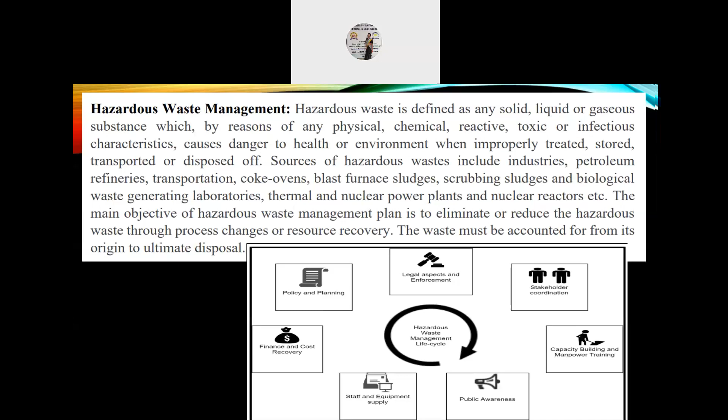Next, the major components of a hazardous waste management plan are as follows. Number one, inventory, which I have already shown in the picture. This is the explanation. So all the industries producing more than 100 kg of hazardous waste per month should be registered. So an inventory of such waste generating agencies and the quantity of waste produced per month should be prepared.

Number two, storage. The hazardous waste generating plants should equip themselves with special on-site tanks, chemically resistant containers or basins for storage of waste. Number three, transport. The waste must be transported by suitable tanker trucks, flatbed trucks or rail cars to the approved disposal sites.

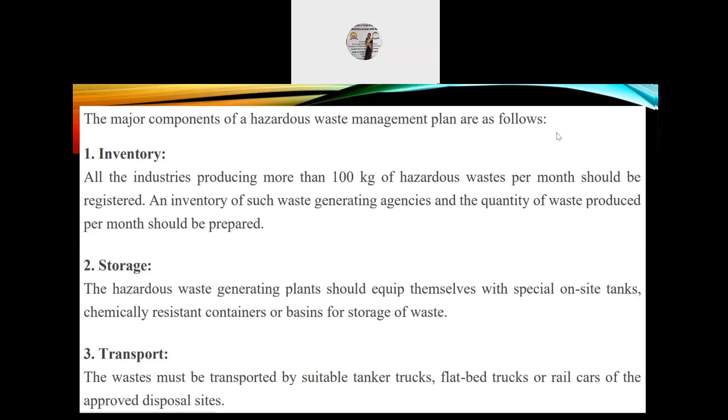Number four, spillage. A well-publicized emergency plan should be prepared to deal with unexpected spillage or accidental release of contaminants during transportation to prevent environmental damage and public health hazard. Number five, disposal. The waste should be transported to a physical and chemical treatment plant for processing or concentration or hauled directly to an approved hazardous waste treatment facility for final disposal.

Number six, waste exchange. When on-site recycling or recovery of waste is not feasible, that is not approachable, the possibility of waste exchange should be explored. So, transferring waste from large industries to smaller ones, which are able to reuse low purity oils, acids, alkali, solvents, or recover valuable metals and other materials from concentrated waste, can also be considered.

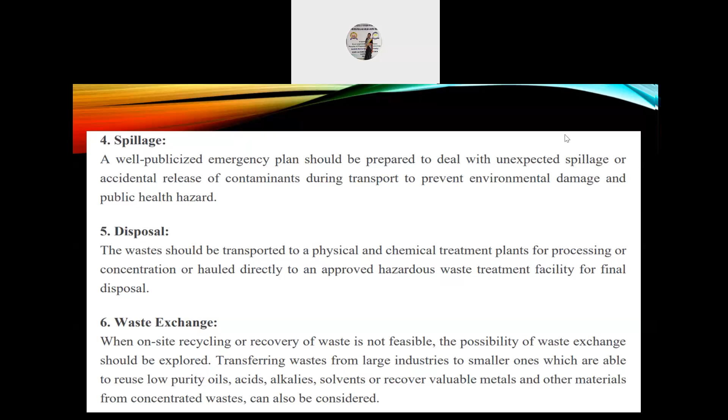The next topic is flood control of dams. So, flow-through dams, also known as perforated dams, are constructed solely for the purpose of flood control and mitigation of flood risk in downstream communities and ecosystems. So, unlike reservoir dams, which are built primarily for water storage or power generation, the spillway, which is the opening, is built at the same height as the riverbed level, allowing the river to continue its natural flow in normal conditions. When the water level rises above the spillway, the dam restricts the amount flowing through the opening, decreasing peak flood flow.

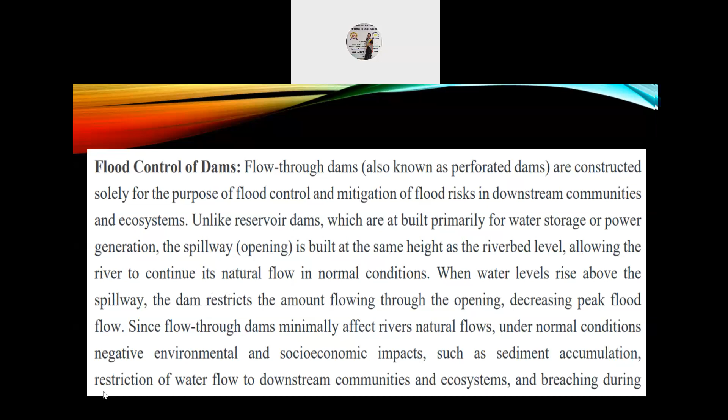Since flow-through dams minimally affect rivers' natural flows under normal conditions, negative environmental and socio-economic impacts such as sediment accumulation, restriction of water flow to downstream communities and ecosystems, and breaching during very extreme flood events can be minimized or avoided altogether. So flow-through dams are constructed in high flood risk areas, particularly those with important infrastructure and livelihoods.

So planners, local decision makers, and construction engineers are the typical stakeholders involved in construction site choice as well as spillway and wall height selection and setting of desired river flow rates and dam carrying capacity. So post-dam construction, socio-economic and environmental impact assessment criteria should be established as part of implementation to avoid negative impacts on ecosystems and local communities. Operational management typically includes general maintenance and occasional clearing of sediments or other accumulations preventing optimal water flow.

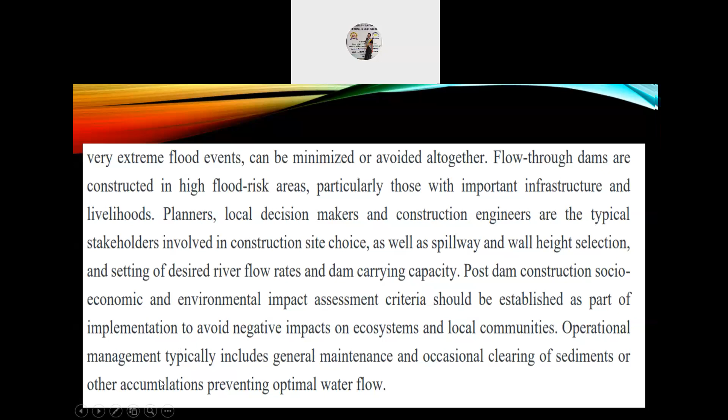So the next topic is multi-purpose water projects. The multi-purpose projects are explained here below. The first one is the Damodar Valley project.

The aggressive Damodar during the rainy season, with all its surplus water, used to engulf the entire region. So periodic and successive flood was so disastrous that Damodar was aptly known as the Curse of Bengal. But after the construction of several dams, recurrence of flood is nowadays a bygone chapter.

So storage dams were constructed at Tilaiya, Maithan, Panchet and Konar. The combined area controlled by all these dams is about 13,500 square kilometers. Hydropower generation plants were erected at Panchet, Tilaiya and Maithon.

So three thermal stations were also created at Chandrapura, Durgapur and Bokaro to provide power to the core sectors of industry and commerce, for example railways, steel plants, coal mines. The major objective of this pioneer

Maybe you should increase your volume, because the volume at my end is full. And also those who are giving your attendance now, I won't accept it since the class is still going on and I am not asking for your attendance now. So it would be better if you concentrate on the lecture.

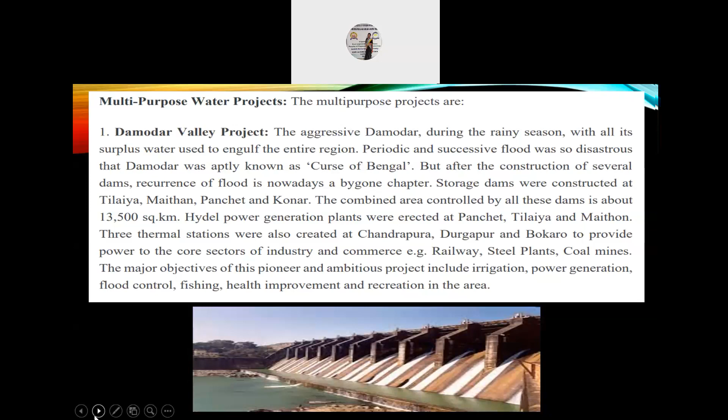Okay, so number two, Bhakra Nangal project. It is the most ambitious project to convert large barren semi-arid tracts of northwest India into lush green fertile agricultural fields. Bhakra Nangal project was one of the largest multipurpose Indian projects constructed over the river Sutlej. So from the constructional point of view, indeed, erection of this dam was a remarkable achievement.

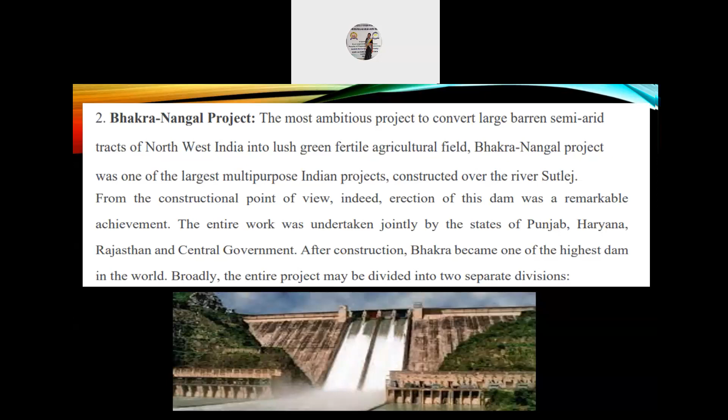So the entire work was undertaken jointly by the states of Punjab, Haryana, Rajasthan and the central government. After construction, Bhakra became one of the highest dams in the world. Broadly, the entire project is divided into two separate divisions. Check your network, Sanjay. The Bhakra Dam: this project has the capacity to store more than 10,000 million cubic meters of water. This lake is known as Govind Sagar.

Number 2, the Nangal Dam, constructed 13 km downstream of Bhakra. Any irregularities caused by Bhakra Dam are rectified here, and the stability of the channel is maintained. So the combined length of the Bhakra Nangal Canal exceeds 1000 kilometers.

So apart from the two main dam storages, this project comprises several other hydel projects at places like Ganguwal and Kotla with total installed capacity of over 1500 megawatts, and a number of irrigation canals like the Bhakra Canal, Nangal Canal, Bist Doab Canal, Sirhind Canal, etc. So almost all of Punjab and large areas of Haryana and Rajasthan are benefited directly by the Bhakra Nangal multipurpose project.

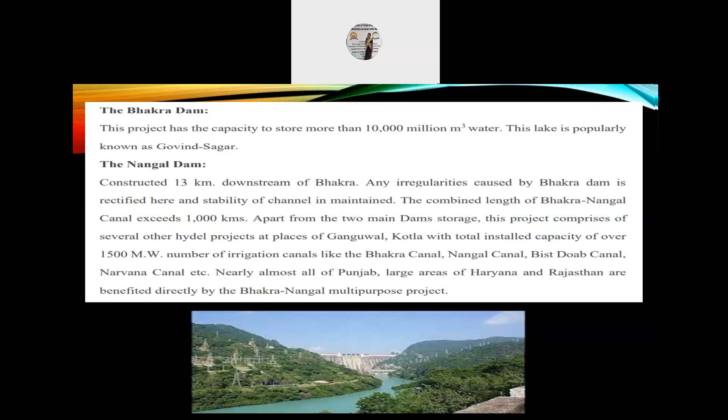Next, the Hirakud project. Mahanadi is the lifeline of Orissa; it enters Orissa from the highland of Naraj. This rapid fall from considerable height provoked planners to erect this monumental dam at Hirakud. This is the longest dam in India. The major benefits behind the construction of this dam were to harness the ample hydel power from the swift flow of water, to control occasional floods and resultant havoc, irrigation canals to large areas of Puri and Cuttack districts,

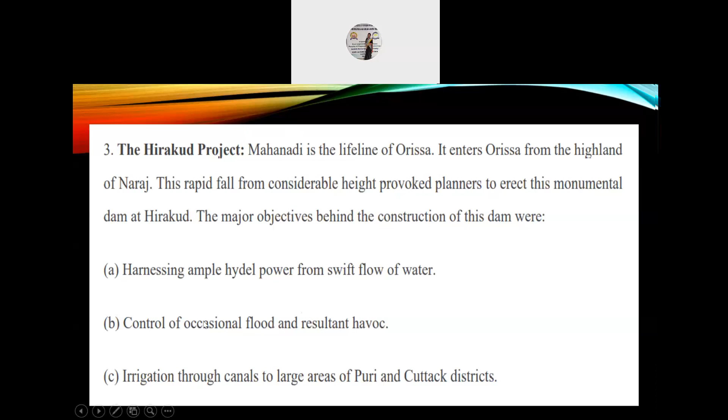then improvement of water transport through greater navigability, overall economic development of the area by providing employment at the project, rapid industrialization of the area through stable and assured power supply, and the increase of other minor economic activities like fishing and tourism.

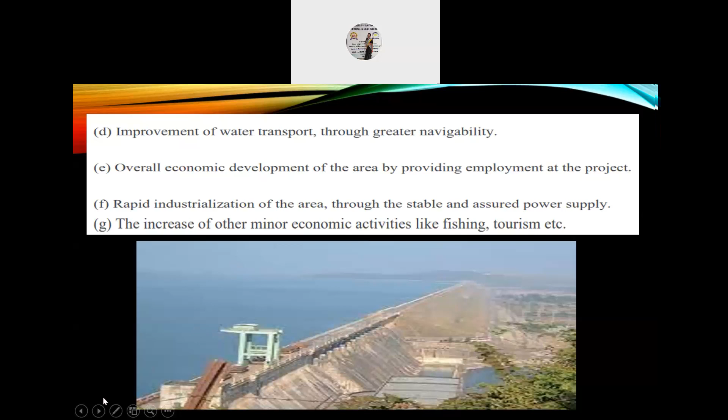Number 4, the Nagarjuna Sagar project. This is the biggest river project in Andhra Pradesh. A dam was constructed near Nandikonda village. This project was made to ensure irrigation water in Khammam, Guntur and Kurnool districts.

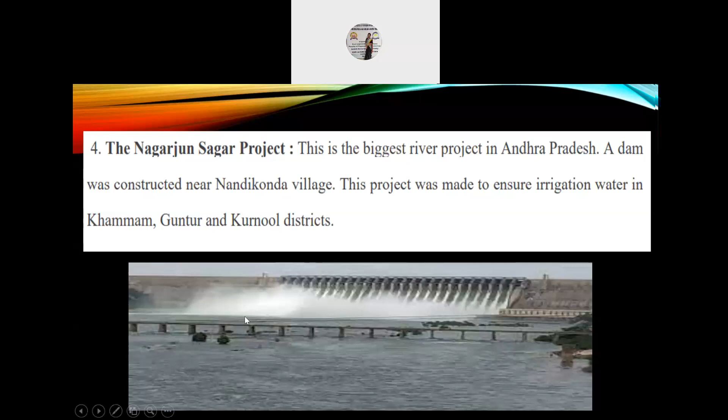The last one, number 5, the Beas project. This project was constructed as the extension of the Bhakra Nangal project. The growing need of irrigation and consequent increasing demand of electricity compelled the planners to select Beas as the potential source of water for another multipurpose project. This project may be divided into two distinct parts.

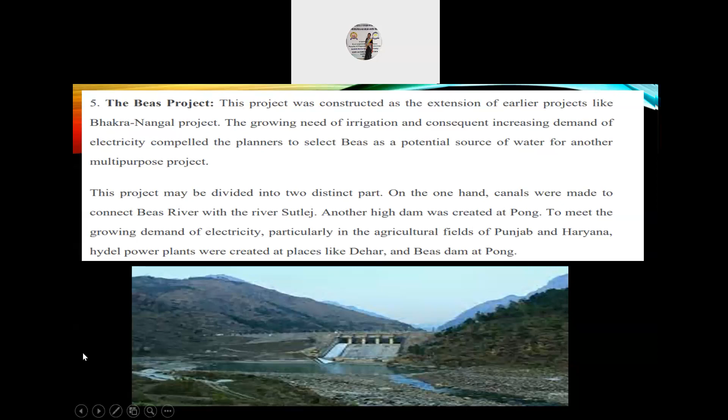On one hand, canals were made to connect the Beas River with the river Sutlej. Another high dam was created at Pong, in the Himalaya. To meet the growing demand of electricity, particularly in the agricultural fields of Punjab and Haryana, hydel power plants were created at places like Dehar and the Beas Dam at Pong.

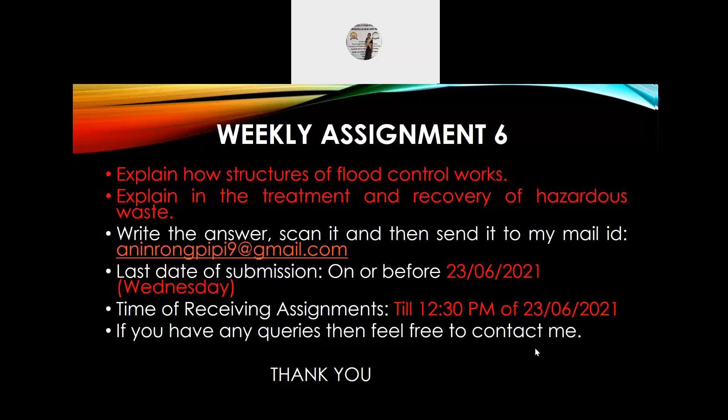So this is weekly assignment number 6. You have to explain how structures of flood control work, and the second one, you have to explain the treatment and recovery of hazardous waste materials. The last date of submission is given here, and the last time of receiving the assignments is also given. It is till 12:30 p.m. of 23rd June.

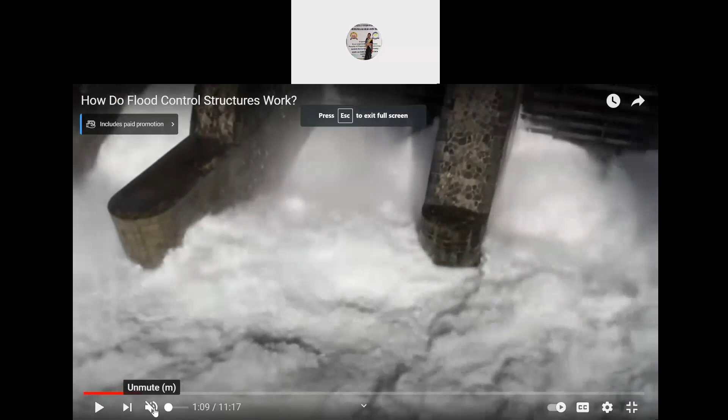We all know generally what a flood is. Too much water in one place at one time. But I think there's still uncertainty in how floods actually occur. Part of the reason for that confusion, I think, is the huge variety of scales we have when talking about flooding. Most river systems are dendritic. The topography of the land and long-term geologic processes mean that streams join and concentrate the further you move downstream, just like the branches of a tree.

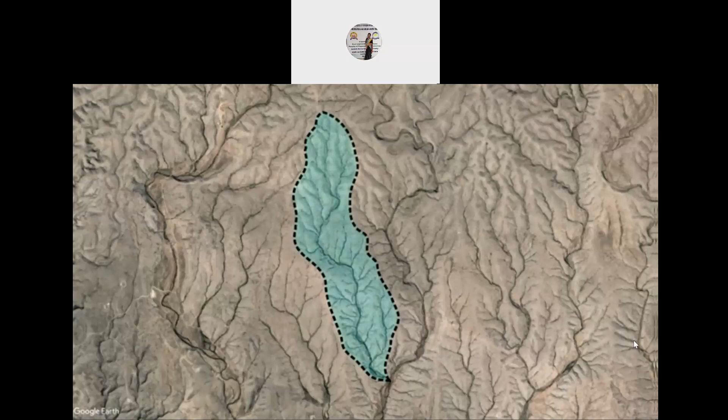A watershed is the entire area of land where precipitation collects and drains into a common outlet. It's a funnel. And as you move downstream, those funnels start to combine. The further you go, the larger the watershed becomes as more and more streams contribute to drainage. So watersheds can be tiny or gigantic. Your front yard is a watershed to the gutter on the street. If it happens to be raining hard directly on your house, the gutter will flood, maybe even overtop the road onto the sidewalk.

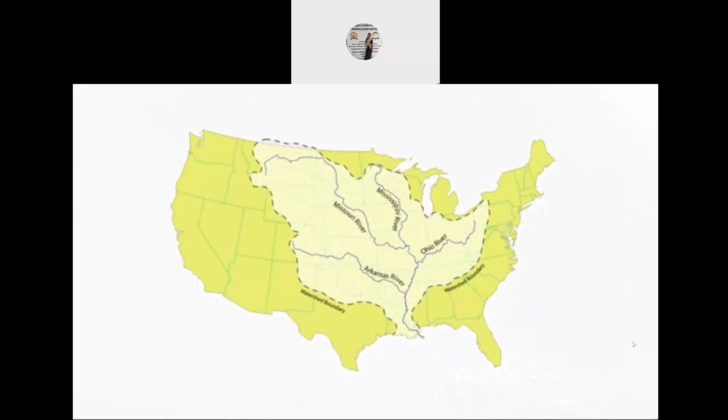At the complete opposite end of the spectrum, more than 1 million square miles, or 3 million square kilometers, make up the drainage area of the Mississippi River in the US. A big rainstorm in one city is not going to make a dent in the total flow of this river. But if everywhere in the basin is having an unseasonably wet year, that can add up into major flooding as all that water concentrates into a single waterway. This seems simple, but it's a real conceptual challenge in understanding flooding, not to mention trying to control it.

Smaller watersheds only flood during single intense storm events called flash floods. Usually this water is already long gone by the time the next storm comes. In contrast, large watersheds flood in response to widespread and sustained wet weather. They aren't really affected by single storm events. Of course, in a dendritic system, there's everything in between, which means a flood can be a local event affecting a few houses and streets for a couple of hours during an intense thunderstorm, or a months-long ordeal impacting huge swaths of land and multiple communities.

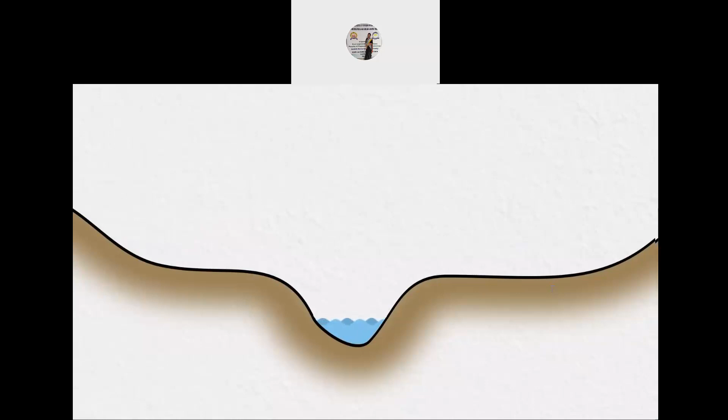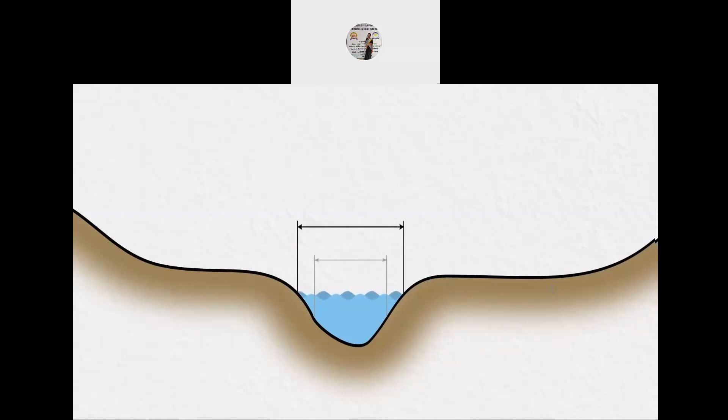Riverine flooding is also a challenge because it's not linear. This is a generalized cross-section through a river. You have the main channel where most normal flows occur. Every unit of rise in the river doesn't equal that much extra width in inundation. Plus, there's not much development within the banks of a river, maybe some low bridges and a few docks. But above the channel banks, things change. The slopes aren't so steep, and you end up with wide, flat areas of land. And you know what we humans like to do with wide, flat areas near waterways?

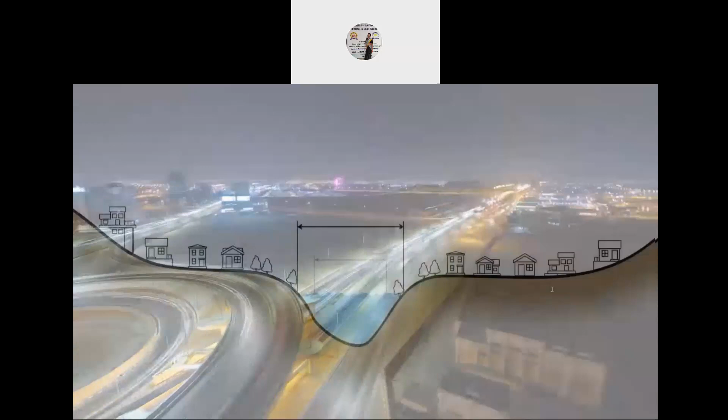We build stuff, like entire cities, there or use it as farmland. The problem is that once a channel overbanks, every unit of rise in the river equals much wider extents of inundation. You can see now why this is called the floodplain.

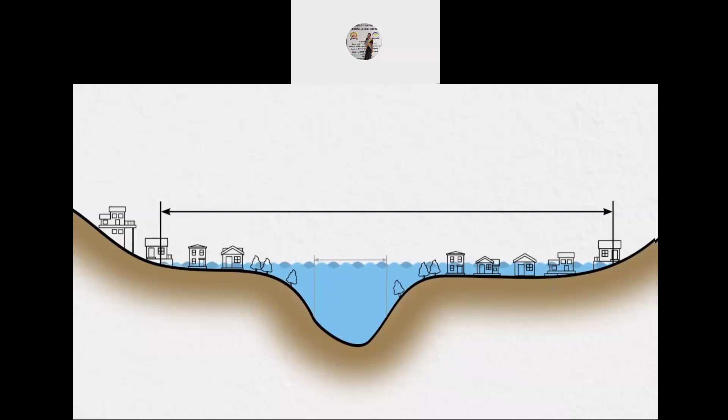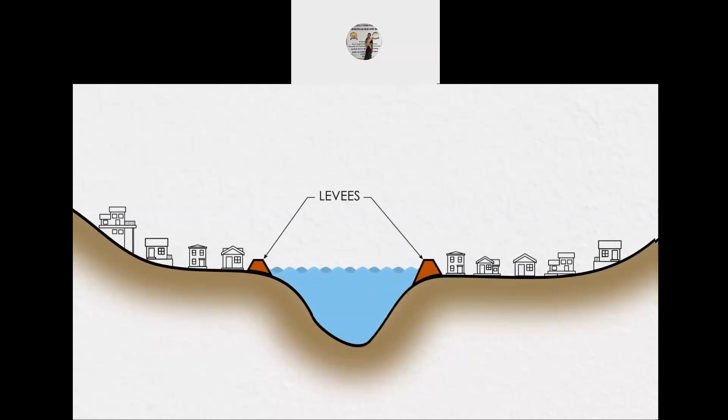And looking at a cross-sectional view, it's easy to see one of the most common structural solutions to flooding: levees. If overtopping the banks of the river creates the problem, we can just make the banks of the river higher by building earthen embankments or concrete walls. Levees protect flood-prone areas by confining rivers within artificial banks. That means areas outside the levees flood less frequently.

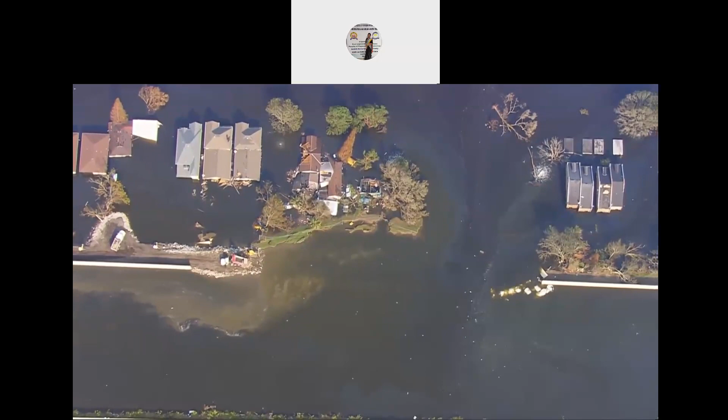It doesn't mean they have zero flood risk at all, since it's always possible to have an extreme event that overwhelms the levees. For earthen structures, overtopping of a levee can cause erosion and even failure or breach of the berm. That can make flooding even worse than it would have been otherwise, especially if people weren't evacuated from the area ahead of time. So even though they're a pretty simple solution to the problem of flooding, levees aren't perfect.

Sometimes getting that water out of the channel is exactly what you want, though. Another tried and true flood control technique is diversion canals. These are human-made channels used to divert floodwaters to undeveloped areas where it won't be as damaging. Often it's not possible to widen an existing river because there's already too much development or for environmental reasons. So instead we create a separate channel to divert floodwater around developed areas and back into the natural waterway downstream.

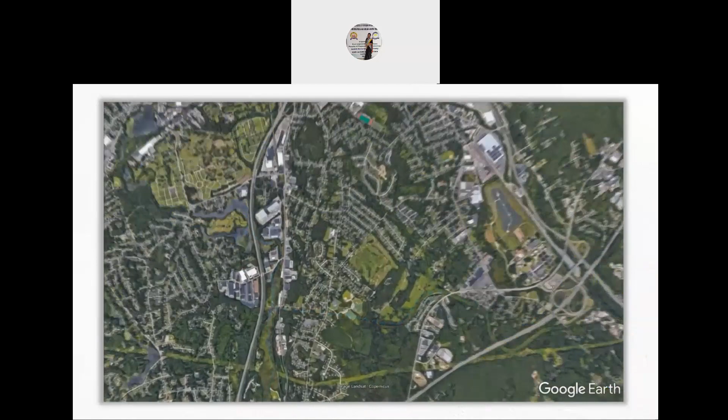In most cases, there will be some kind of structure at the head of the diversion channel to help control which route the water takes. For normal conditions, water will flow through the natural river. But when a flood comes, most of that water will be diverted, reducing the flood risk to developed areas.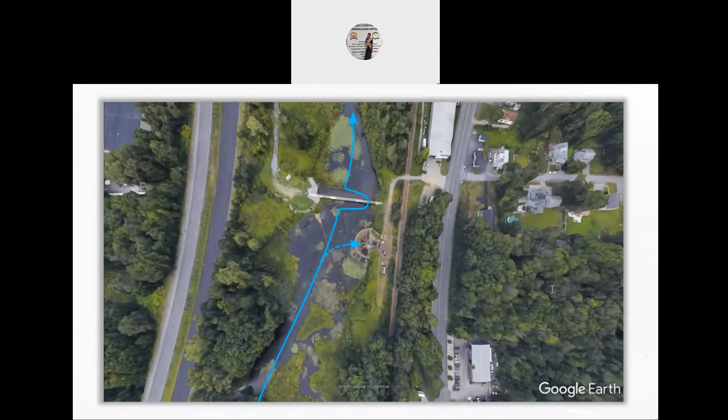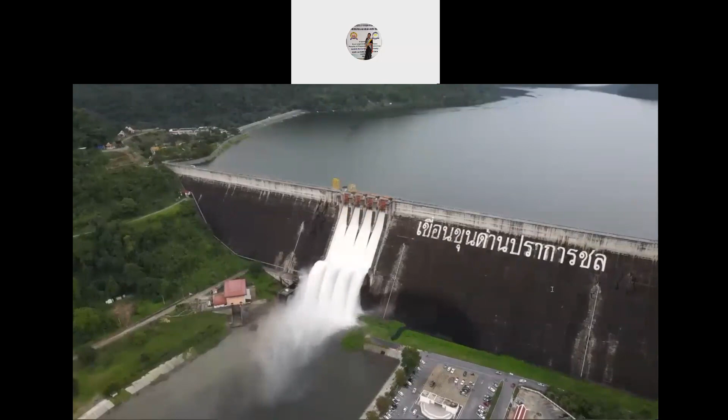But it would be nice if all that water didn't make it into the river in the first place. That's only possible with the other major type of flood control infrastructure, dams. These are structures meant to impound or store large volumes of water, creating reservoirs. Dams meant for flood control are kept partially or completely empty so that when a major flood event occurs, all that water can be stored and released slowly over time.

The theory here isn't too complicated. We can't change the volume of water that comes from a flood, but with enough storage, we can change the time period over which it gets released into the river. Big sloshes of water into this bucket come out slowly over time. As long as the sloshes are far enough apart and the bucket is big enough, you almost never see significant flooding out on the other side.

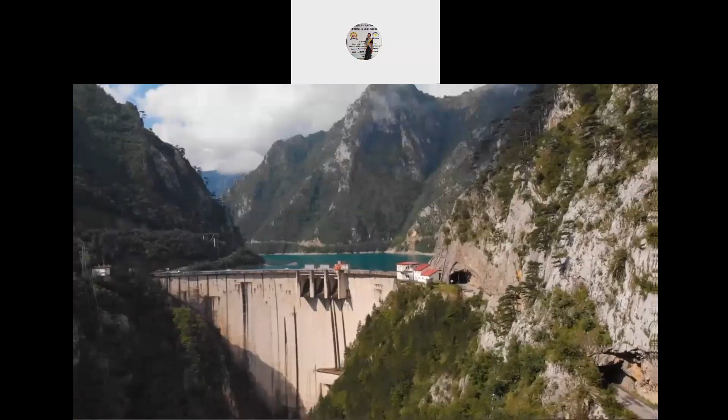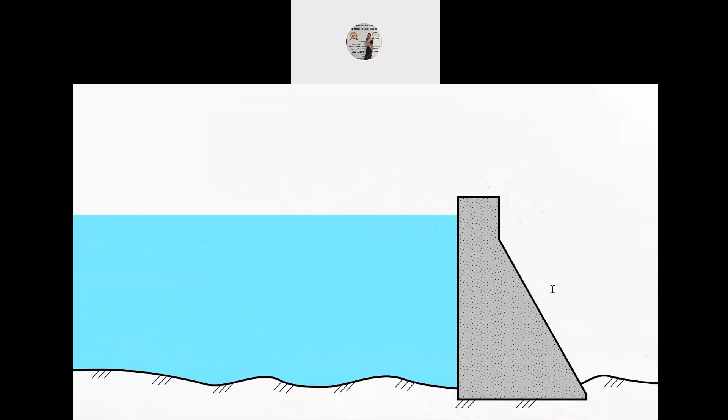But not all dams are built specifically for flood control. Many reservoirs are intended to stay as full as possible so the water can be used for hydropower, supplying cities, or irrigation of crops. If a water supply reservoir happens to be empty at the time of a big flood, it will work just like a flood control reservoir, storing the water for later use. But if the reservoir is already full, they have to open the floodgates to let the water through. This can be frustrating for the residents downstream who may have thought they had protection from the dam.

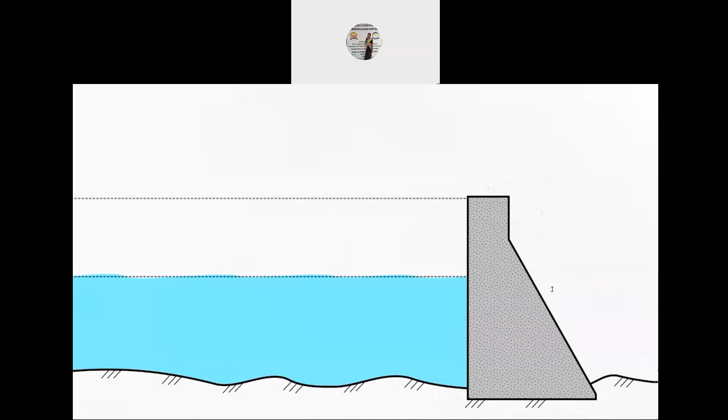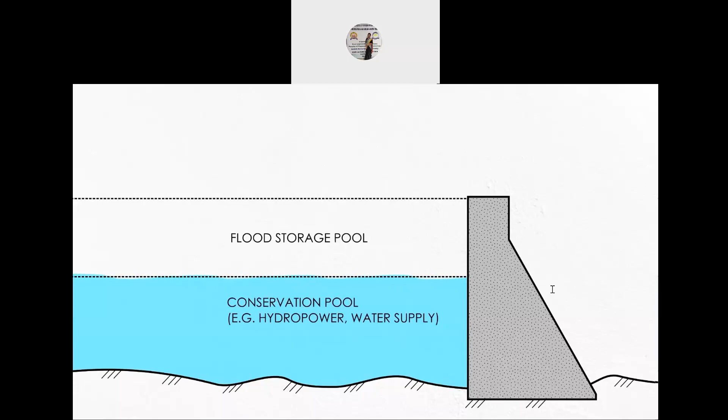In many cases, a dam can serve multiple purposes at the same time. Different zones called pools are established for different uses. One pool is kept full to be used for hydropower or water supply, and one is kept empty to be used for storage in the event of a flood. Finding the right balance point between how much storage to keep full versus empty is a complicated challenge that considers climate, weather, and the maximum amount of flow that can be released without damaging property downstream.

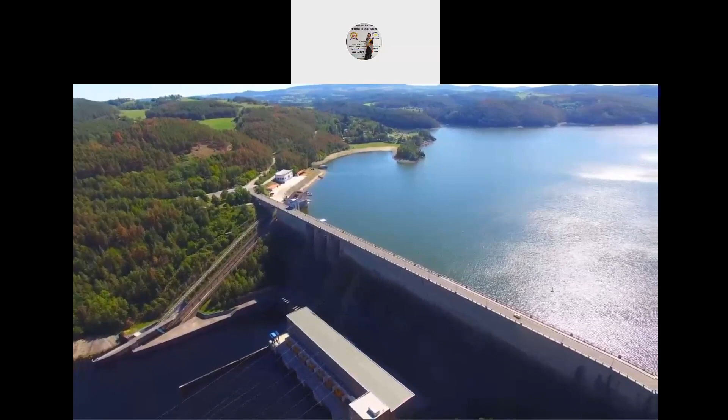Some dams vary the size of these pools over the course of the year, depending on the seasonality of flooding. And some even use risk indicators, like the depth of the snowpack within the watershed, to dynamically adjust the volume available to store a potential flood.

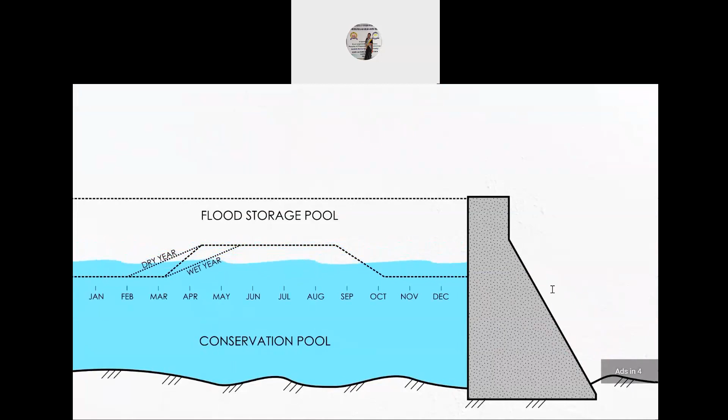I've been using the term flood control throughout this video, but the truth is that term is falling out of favor. Now, if you ask an engineer or a hydrologist, they're more likely to talk about flood risk management. Our ability to quote unquote control Mother Nature is tenuous at best, and the more we try, the more we realize this. Even if expensive infrastructure is helpful in a lot of circumstances, at best it is an incomplete strategy to reduce the impacts of flooding over the long term.

For one, flood control structures, especially levees, can protect some areas while exacerbating flooding in other places. For two, overbanking flows are actually beneficial in a lot of ways. Just like wildfires, flooding is a natural phenomenon that has positive effects on the floodplain, like improving habitat, ecology, soils, and groundwater recharge. And for three, we're understanding more and more the true value of resiliency. That is, instead of reducing the probability of flooding, instead reducing the consequences.

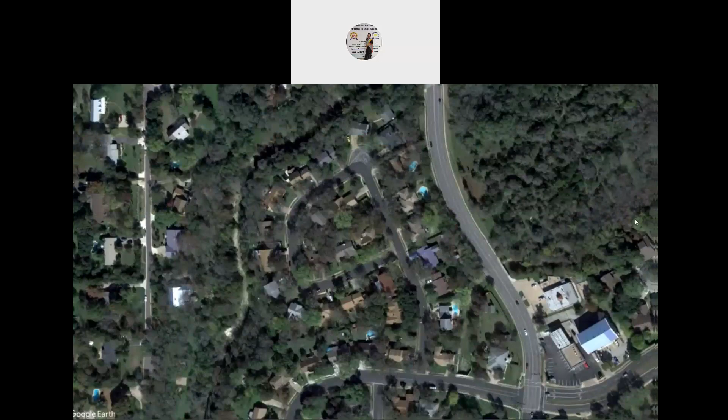This is normally accomplished with strategic development, like reserving or converting the floodplain for natural wetlands, parks, trails, and other purposes that aren't as easily damaged by flooding. In fact, flood buyouts, where high-risk property is purchased and converted to green space, is often the most cost-effective way to reduce flood damages in the long term, even if not the most politically popular strategy.

It's not likely we'll ever have the ability to reduce the volume of rainfall during major storms. And in fact, many locations are already experiencing more extreme rainfall events than they ever have due to climate change. But we will continue to develop strategies, both structural and non, to reduce the risk to lives and property posed by flooding.

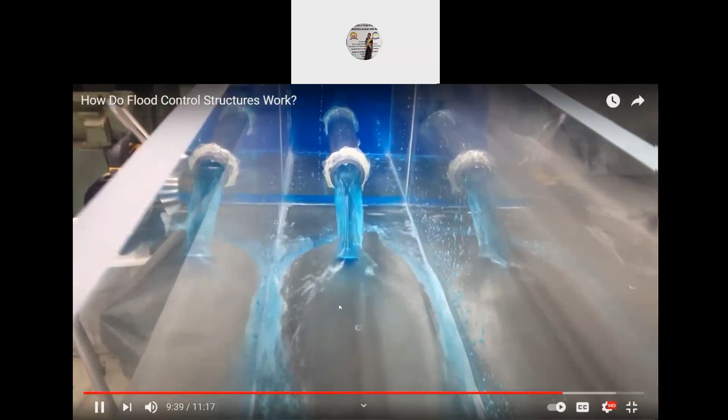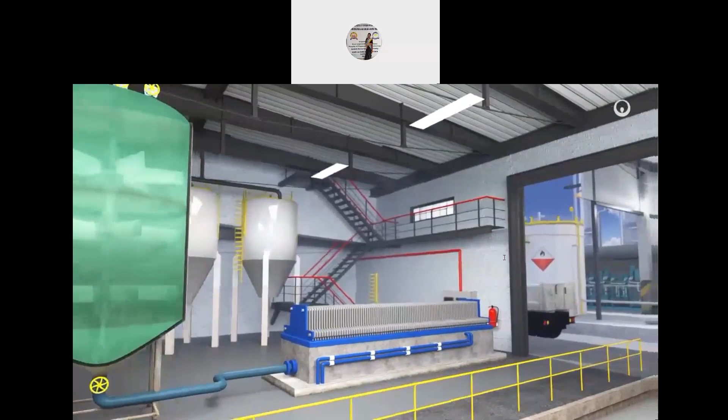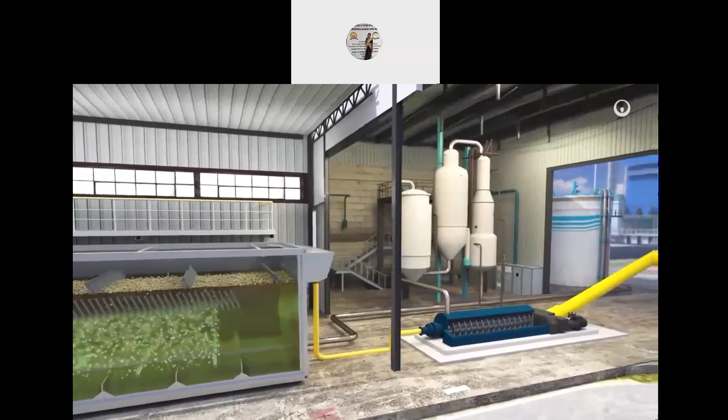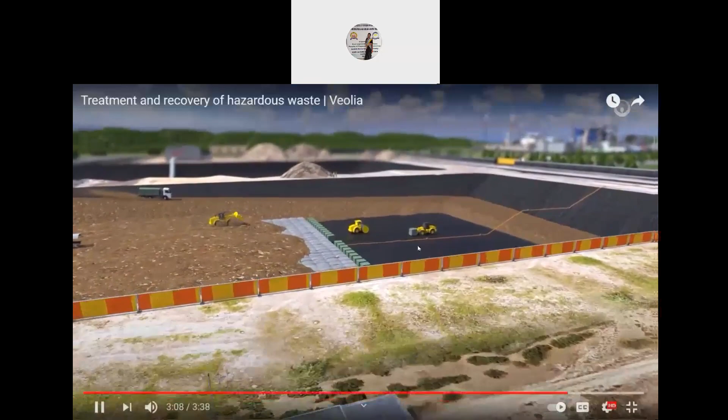Improving access to resources while preserving and replenishing those resources, this is what we do at Veolia. Solid and liquid hazardous waste generated by commercial and industrial activities represents a risk to people and the environment. Contaminated packaging, batteries, paint, clinical waste, hydrocarbons, industrial effluents, and chemical products. We take charge of waste like this every day for disposal or recovery in full compliance with all relevant regulations. And we guarantee the traceability of the entire cycle.